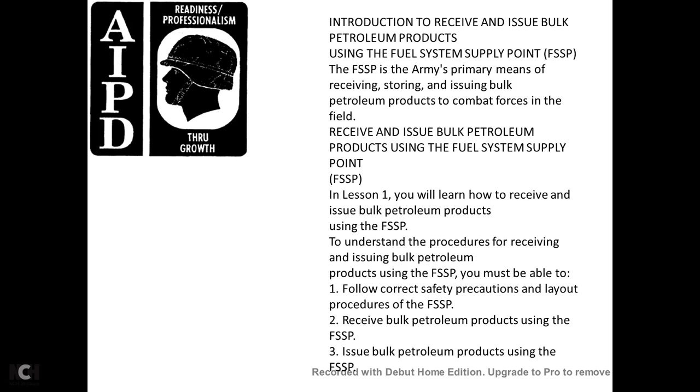To understand the procedure of receiving and issuing bulk petroleum products using the fuel system supply point, you must be able to follow the correct safety precautions, lay out the fuel system supply point, receive bulk products, and issue petroleum products using the fuel system supply point. Learning event number 1: how to follow the correct safety precautions.

Whenever working with petroleum products, there is a risk of fire. The danger can be reduced by following the proper safety precautions during all phases of the operation. The primary precaution is prohibiting smoking near the fuel system supply point. Post no smoking signs so that anyone entering or working in the supply point can see the signs immediately. Do not let anyone carry matches or smoking materials in the supply point. Collect smoking materials at the entrance checkpoint, and ensure that personnel smoke only in designated smoking areas.

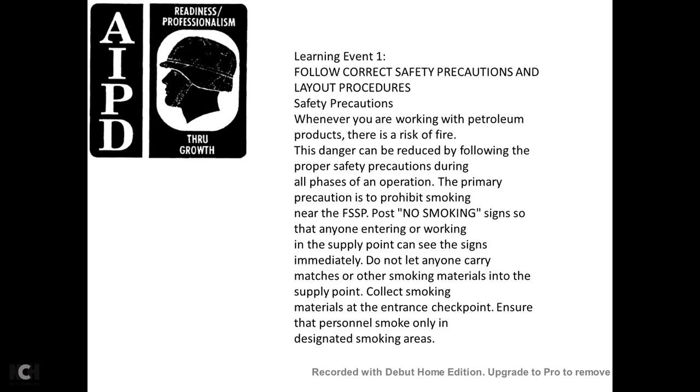Place fire extinguishers at all receipt, storage, and issue points. All fire extinguishers must be operational and inspected daily. Ensure the equipment is grounded. Follow the proper grounding and bonding procedures during all fuel transfer operations. If there is an enemy attack, electrical storm, or fire in the immediate area, stop operations immediately. Disconnect all pump hoses. Move all vehicles out of the area.

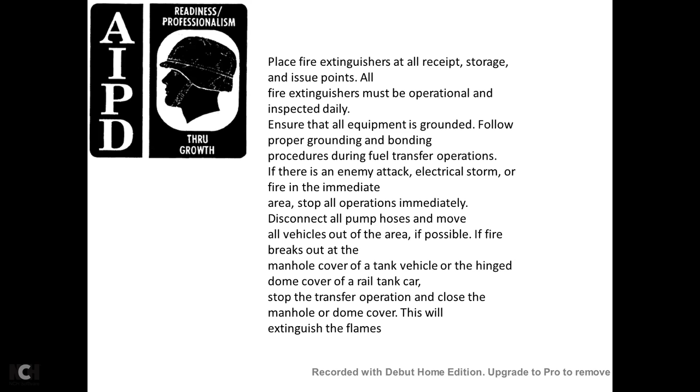If a fire breaks out over the manhole cover of a tank vehicle or the hinged dome cover of a railway tank car, stop the transfer operations and close the manhole dome cover. This will extinguish the flames. Do not permit welding, open flames, or lights other than approved explosion-proof flashlights within 100 feet of any receipt, storage, or issue operation. When operating the pump, if you see sparks, stop the pump and inspect all the grounding and bonding connections. Make sure the connections are bare with metal-to-metal contact. If you cannot find any faulty connections, look at the power equipment in the area to find the possible cause of stray current.

Maintain a distance of at least 25 feet between tank vehicles during receipt and issue operations. Also keep all tractors coupled with the semi-trailers while product is transferred. This allows the semi-trailer to be moved quickly in an emergency. The canvas top of the tractor must cover the driver's compartment of the vehicle while loading or unloading product. This keeps the inside of the tractor from being splashed with fuel.

Do not use a nozzle equipped with a locking device. If the nozzle is equipped with a locking device, disable the locking device before use. Ensure the nozzle is attended constantly during fueling. Take all precautions possible to prevent spills, using drip pans whenever hoses are being connected or disconnected, and repair all leaks immediately. If needed, replace defective hose gaskets and valves. All persons must be properly trained and follow all safety precautions. They must know how to properly administer first aid for fuel-related injuries.

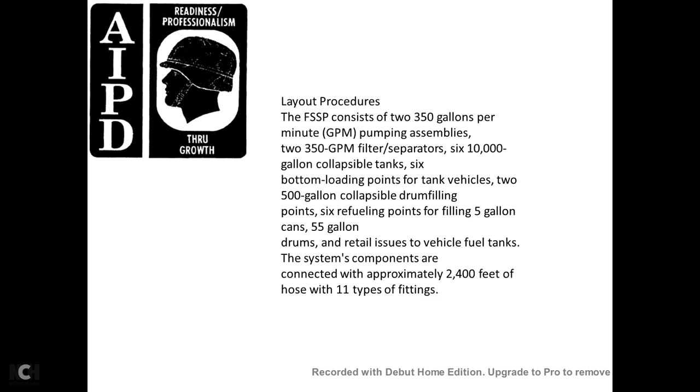Layout procedure of the fuel system supply point. It contains two 350 gallon per minute pumping assemblies, two 350 gallon per minute filter separators, six 10,000 gallon collapsible tanks, 6 bottom loading points for tank vehicles, two 500 gallon collapsible drum filling points, 6 refueling points for filling 5 gallon cans or 55 gallon drums and retail issue to vehicle fuel tanks, with system components connected with approximately 2,400 feet of hose and 11 types of fittings.

The fuel system supply point is designed to be flexible in layout. The system layout depends on the needs of the mission and the variables of the terrain. You must lay out the system and identify the components needed. For example, if your mission does not include the filling of 500 gallon collapsible drums, then you do not include the filling points in your layout.

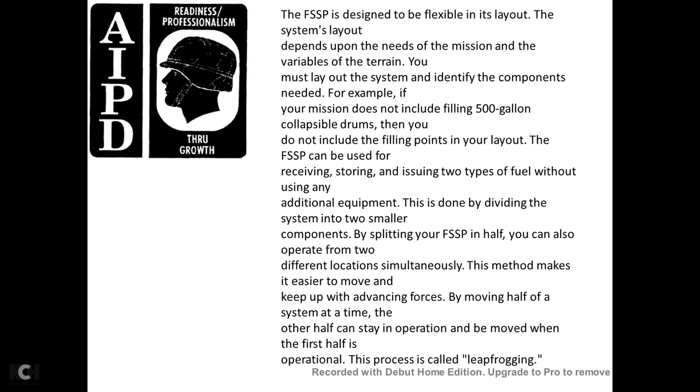The fuel system supply point can be used in receiving, storing, and issuing 2 types of fuel without using additional equipment. This is done by dividing the system into 2 smaller components by splitting your fuel system supply point in half. You can also operate at 2 different locations simultaneously. This method makes it easier to keep up with advancing forces by moving half of the system at a time. The other half stays in operation while the first half moves; this process is called leapfrogging.

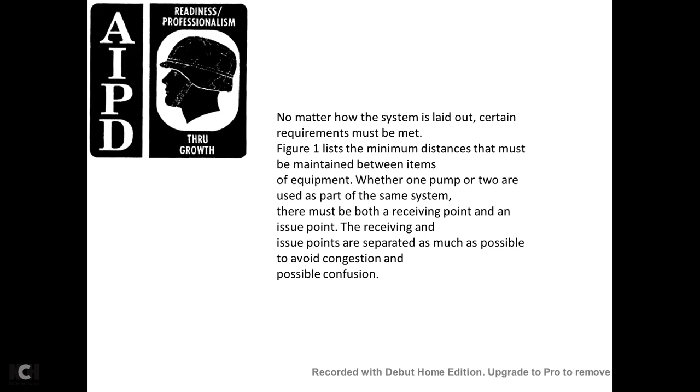No matter how the system is laid out, certain requirements must be met. Figure 1 lists the minimum distances that must be maintained between the items of equipment. Whether one pump or two are used as part of the same system, there must be both a receiving point and an issuing point. The receiving and issuing points are separated as much as possible to avoid congestion and possible confusion.

Figure 1 shows the usual distance between the components of the fuel system supply point: receipt manifold to receiving pump, 60 feet; receiving pump to manifold on the first tank, 60 feet; 10,000 gallon tank to 10,000 gallon tank, 40 feet; manifold on the last tank to the discharge pump, 60 feet; discharge pump to the filter separator, 40 feet; filter separator to fuel servicing nozzle, 60 feet;

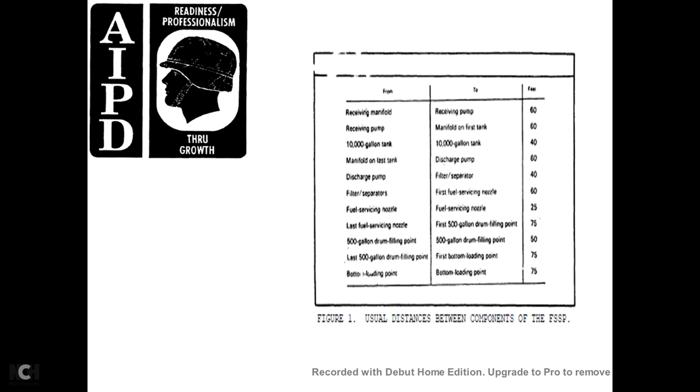fuel servicing nozzle to fuel servicing nozzle, 25 feet; last fuel servicing nozzle to the first 500 gallon drum filling point, 75 feet; 500 gallon drum filling point to 500 gallon drum filling point, 50 feet; last 500 gallon drum point to the first bottom loading point, 75 feet; bottom loading point to bottom loading point, 75 feet.

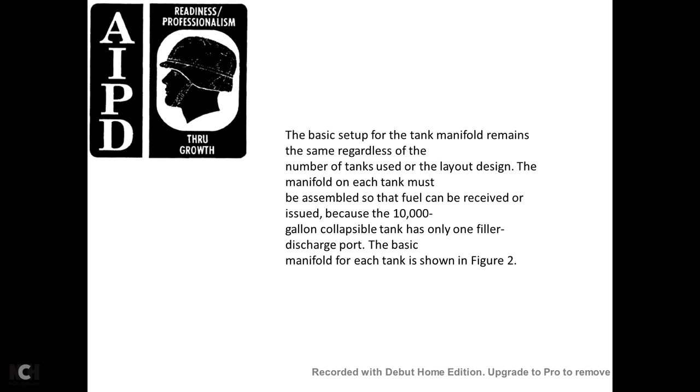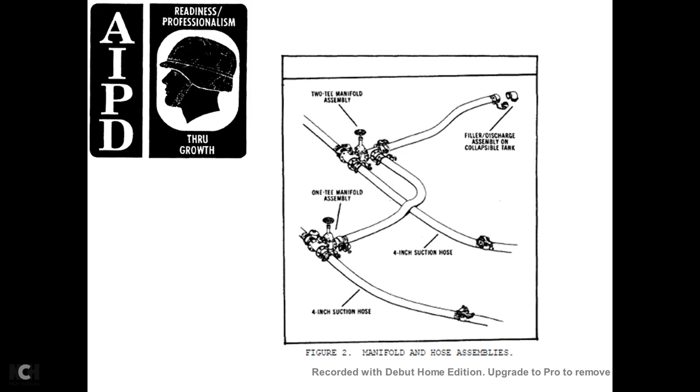The basic setup for the tank manifold remains the same regardless of the number of tanks used for the layout design. The manifold for each tank must be assembled so that fuel can be received and issued, because the 10,000 gallon collapsible tank has only the filler discharge. The basic manifold for each of the tanks is shown in Figure 2. Figure 2 shows the manifold hose assembly with a two-tee assembly, the filler discharge assembly on the collapsible tank, over to the one-tee manifold assembly in 4 sections with two 4-inch suction hoses.

Various ways of laying out the complete fuel system supply point are shown in Figure 3. Lay out the system the best way possible for the specific situation. After you decide how to lay out the system, you must prepare the areas where the tanks will be positioned. Pick up all the loose debris.

All the collapsible tanks will be surrounded with a firewall. The firewall must be large enough to contain the entire contents of the tank plus one foot of freeboard empty space. To meet this requirement, the firewall must be 26 by 26 feet inside. The firewall must be 3 feet high and 8 inches wide at the top of the berm. Figure 4 displays a berm in construction.

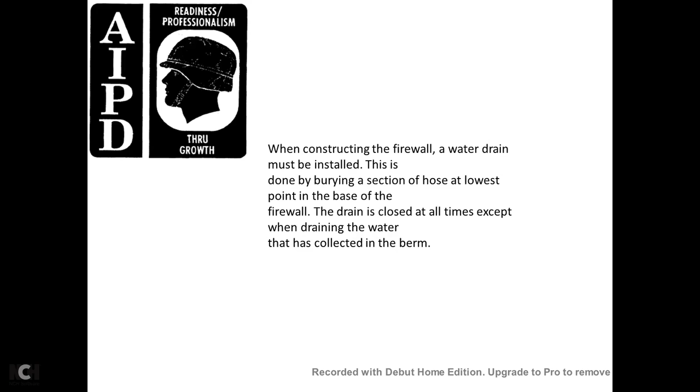Alright, here are the possible arrangements of the fuel system supply points. You have your U arrangement: the receiving point, receiving pump, filter separator, and collapsible tanks going in a U shape, with a filter separator and delivery pump going to the bottom loading points, 500 gallon collapsible drum filling points, and nozzles. The rectangular arrangement gives a receiving point, receiving pump, filter separator, and collapsible tanks in a rectangle, going through a delivery pump, filter separator, bottom loading, 500 gallon collapsible drum filling, and nozzles.

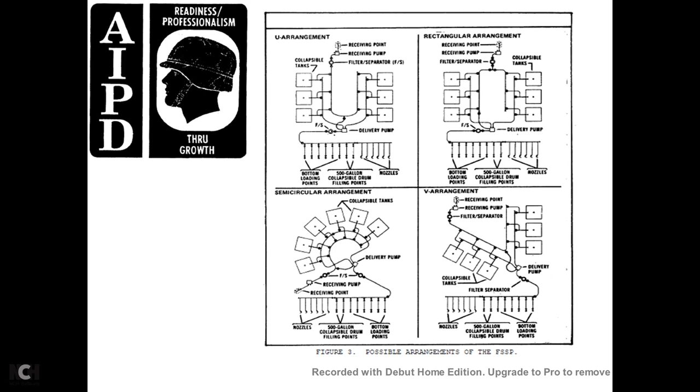All right, your semicircular arrangement goes from the receiving point and receiving pump to the filter separator, to the semicircular tank arrangement, back to the delivery pump and the fuel supply going to the nozzles, 500 gallon collapsible drum filling points, and bottom loading points. The V arrangement is a receiving point, receiving pump, and filter separator to the V arrangement of collapsible tanks, then to the delivery pump, filter separator, nozzles, 500 gallon collapsible drum filling points, and bottom loading points.

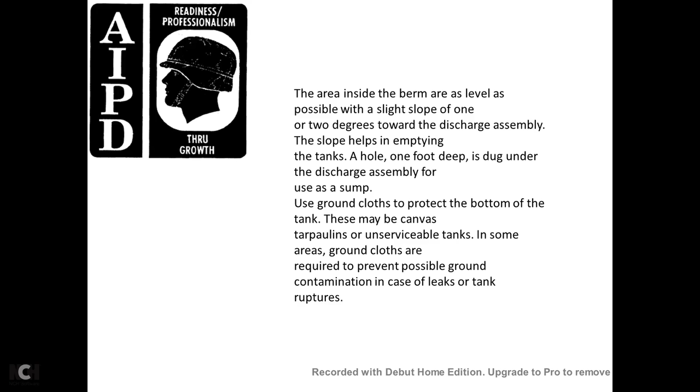The areas inside the berms are leveled, with a possible slight slope of 1 to 2 degrees toward the discharge assembly. The slope helps empty the tank. A hole 1 foot deep is dug under the discharge assembly for use as a sump. Use ground cloths to protect the bottom of the tank. These may be canvas tarpaulins or unserviceable tanks. In some areas, ground cloths are required to prevent possible ground contamination in case of leaks or if the tank ruptures.

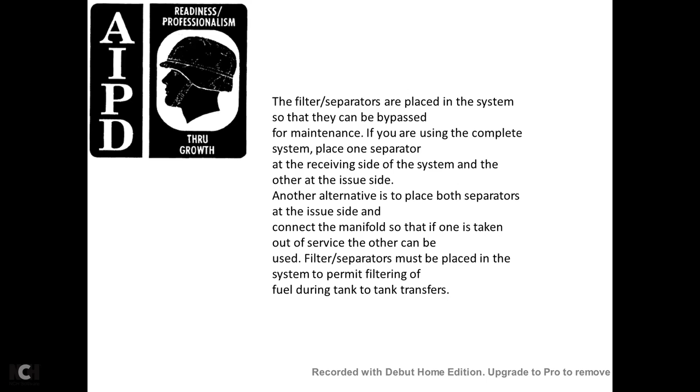Filter separators are placed in systems so that they can be bypassed for maintenance. If you're using the complete system, place one separator on the receiving side of the system and the other on the issue side. Another alternative is to place both separators on the issue side connecting manifold so that one can be taken out of service and the other used. The filter separator must be placed in the system permitting filtering of fuel during tank transfers. When personnel are laying out the hoses for the system, ensure that they only remove the dust caps and plugs when ready to make the connection.

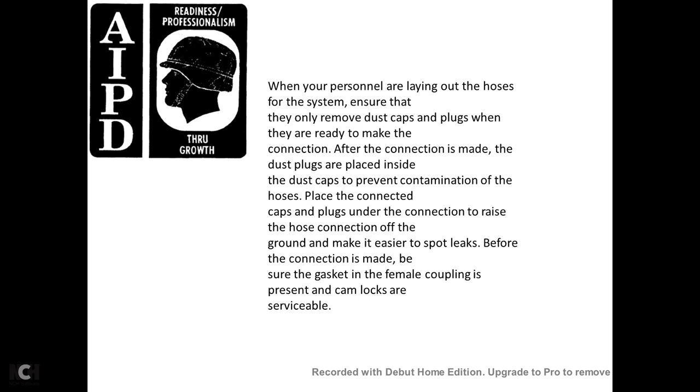After the connection is made, the dust plugs are placed inside the dust caps to prevent contamination of the hose. Then place the connected caps and plugs under the connection to raise the hose connection off the ground and make it easier to spot leaks. Before the connection is made, make sure the gasket in the female coupling is present and the cam locks are serviceable.

Learning event 2: receiving bulk petroleum products. Plan the procedure to avoid interruptions and delays. Prepare the receiving schedule before the products arrive. You are notified of the type and amount of the product as well as the date and time of arrival before receiving the product. Inspect the pumps, filter separators, hose, valves, and fittings for cleanliness and good working condition. Check the collapsible tanks for cleanliness, damage, and available space for the product receipt. Do this before the product arrives at the location.

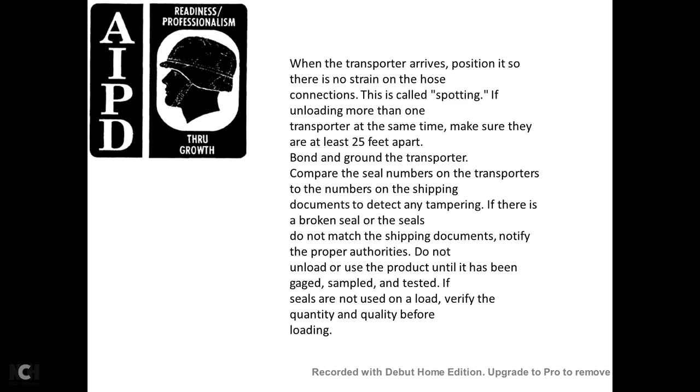When the transporter arrives, position it so that there is no strain on the hose connection when spotting. If unloading more than one transporter at the same time, make sure they are at least 25 feet apart for bonding and grounding of the transport. Compare the seal number on the transport with the number on the shipping document to detect tampering. If there's a broken seal or seals that do not match the shipping documentation, notify the proper authorities. Do not unload or use the product until it has been gauged, sampled, and tested. If seals are not used, verify the quantity and quality before unloading.

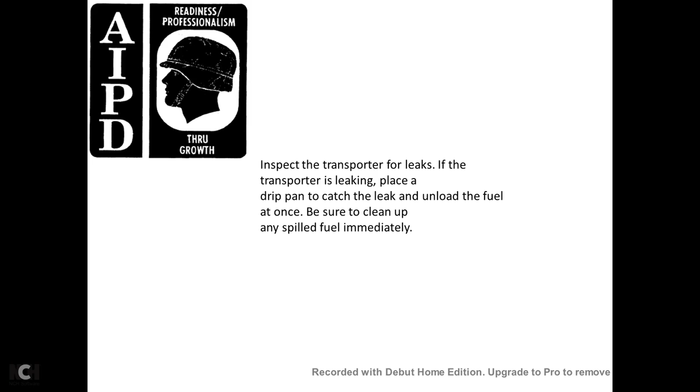Inspect the transporter for leaks. If the transporter is leaking, place a drip pan to catch the leak. Unload the fuel at once and be sure to clean up any spilled fuel immediately. Unloading tank vehicles: before starting the unloading operation, make sure the vehicle and the major components of the supply point are bonded and grounded. Place the drip pan under the manifold of the vehicle before making the connection. Make sure that you have a fire extinguisher near the receiving point. Follow these safety precautions.

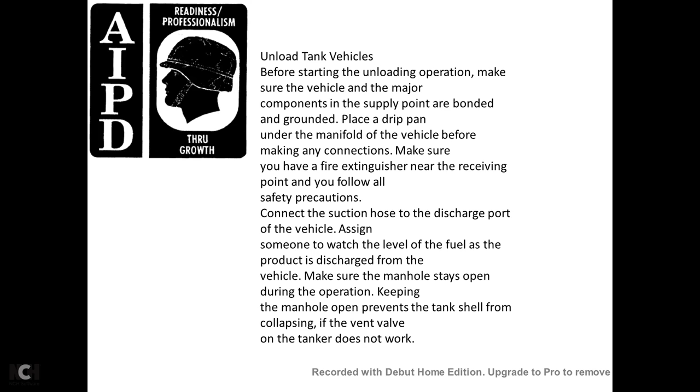Connect the suction hose to the discharge port of the vehicle. Assign someone to watch the level of the product being discharged from the vehicle. Make sure the manhole stays open during the operation. Keeping the manhole open prevents the tank shell from collapsing if the vent valve on the tanker does not work. Open the discharge valve of the tank and the suction valve of the 350 gallon per minute pumping assembly of the fuel system supply point, and start the pump at idle speed for 3 to 5 minutes.

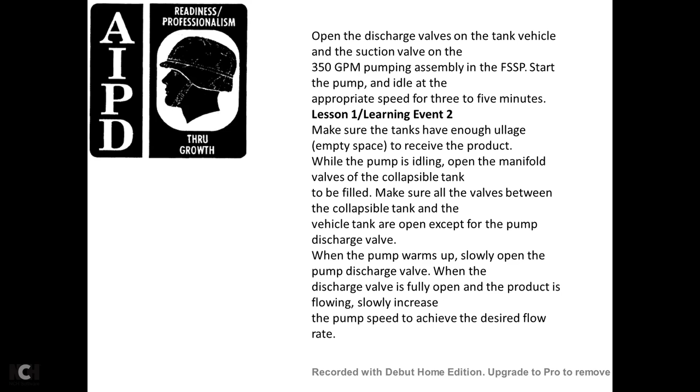Lesson 1, learning event 2 continued. Make sure the tanks have enough ullage, or empty space, to receive the product while the pump is idling. Open the manifold valves on the collapsible tank to be filled. Make sure that the valves between the collapsible tank and the vehicle are open, except for the pump discharge valve. When the pump warms up, slowly open the pump discharge valve. When the discharge valve is fully open and the product is flowing, slowly increase the pump speed to achieve the desired flow rate.

While the tank vehicle is being unloaded, check the hoses, valves, pumps, and receiving tanks for leaks. Place a drip pan under any leak. Stop the operation immediately and make any necessary repairs before continuing the operation. When the transporter is empty, idle the pump engine. Then close the discharge valve and allow the engine to idle for 3 to 5 minutes before turning it off. Close the pump suction valve, close the manhole, and close all the valves. Disconnect the suction hose and the ground wire from the vehicle. The vehicle is moved away and you prepare for the next operation.

Unloading tank cars: you may be able to set up the fuel system supply point close enough to the railroad track to receive product from railway tank cars. This allows large shipments of fuel, which frees vehicles to move other materials on the main supply route. When receiving product from a railway car, use the standard procedures for spotting railway cars. After spotting, set the brakes and chock the wheels. Place a sign reading stop, tank car connected, between the rails at a distance of at least 25 feet ahead of and behind the railway car.

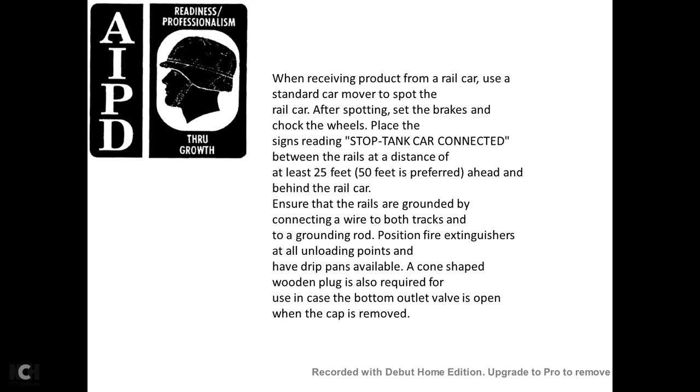Ensure the rails are grounded by connecting wires from both tracks to the ground rod. Position fire extinguishers at all unloading points. Have drip pans available, and a cone-shaped wooden plug, which is required in case the bottom outlet valve is open when the cap is removed. When the rail tank car is in position and grounded, make a quick inspection for leaks before receiving from the railway car.

If you receive a railway car that is leaking, place a drip pan under the leak and unload the car as soon as possible. Perform preliminary steps to ensure that the product is suitable for use and has not been tampered with. Unload the railway tanker car through the bottom outlet valve unless the valve is broken, or unless the proper adapter for the railway tanker car is not available. In this case, unload the car from the dome with a suction hose.

When operating the manhole cover of the railway car, stand upwind. Avoid breathing fumes. If possible, release the internal pressure before opening. Check the size of the bottom outlet pipe to get the correct size adapter, If you are using the adjustable coupling, the size is not important. Outlet pipes vary in size from 4 inches to 6 inches, so it is important to use the correct adapter connection. Connect the suction hose to the adapter.

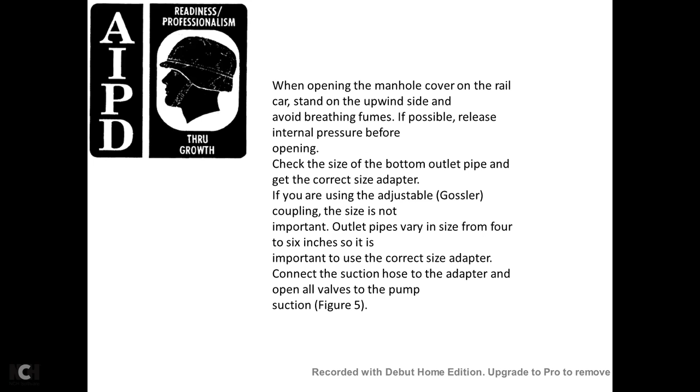Now open all the valves of the pump suction, figure 5. Open the pump suction valve. Start the pump and idle the pump 3 to 5 minutes. While the pump is idling, open the valve between the pump and the discharge receiving tank, having one person monitor the fuel level in the tank being unloaded. As the pump engine warms up, slowly open the discharge valve. Increase the pump speed to the desired flow rate while transferring the product.

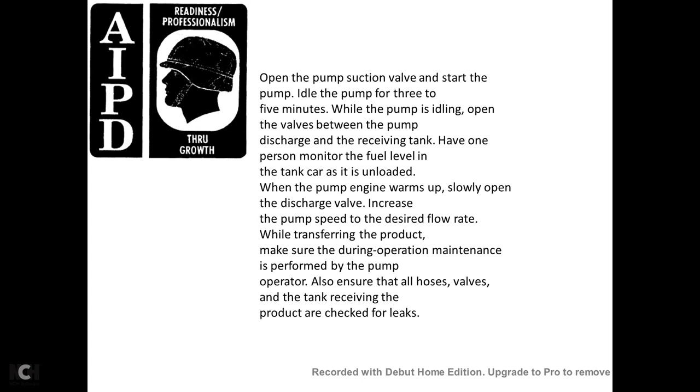Make sure that during operation maintenance is performed on the pump by the pump operator. Also ensure that all hoses, valves, and tanks receiving the product are checked for leaks. If a leak is found during unloading, place the drip pan under the leak. Stop the operation. Make the necessary repairs before resuming the transfer operation.

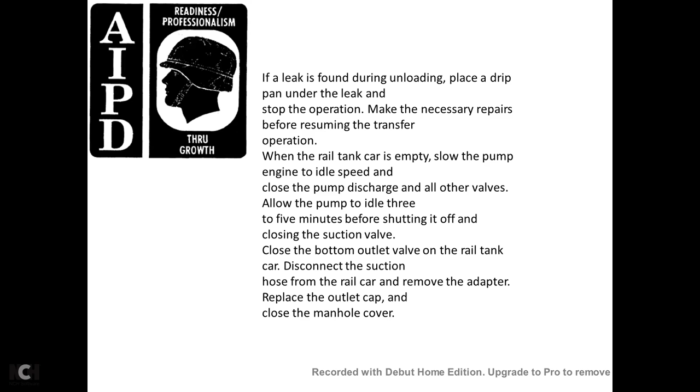When the railway tanker car is empty, slowly bring the pump engine to idle speed. Close the pump discharge valve. Allow the pump to idle for 3 to 5 minutes before shutting it off. Close the suction valve. Close the bottom outlet valve of the railway tanker car. Disconnect the suction hose from the railway car. Remove the adapter. Replace the outlet cap and close the manhole cover.

On all sides of the railway car, diamond-shaped cards say flammable. Remove the cards. Replace them with dangerous empty cards. Some of the cards are printed on both sides, in which case flip them over. Disconnect the ground wire from the rail car. Release the brakes and remove the chock block. Remove it from the transfer area. Notify the proper authorities the car is ready to be removed.

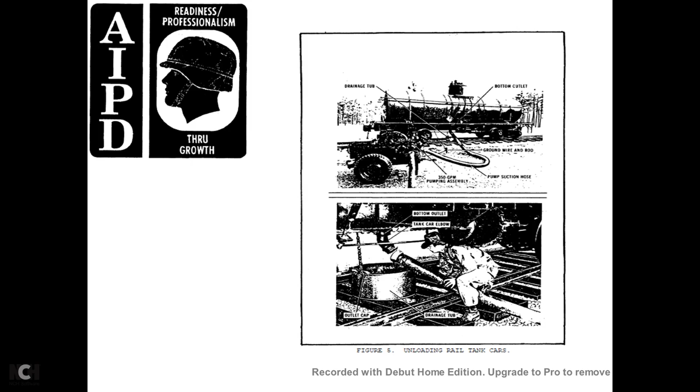Alright, figure 5 shows unloading the railway tanker cars. In the top picture, you see a drainage tub, a 350-GPM pump assembly, a pump suction hose, a ground wire and rod, and a bottom outlet. The bottom outlet has a tanker car elbow, an outlet cap, and a drainage tub.

Receipt of the product through a hose line. In some cases, you receive the product for your fuel system supply point through a hose line. As with the railway tanker, this has the advantage of freeing up other supply resources, and an added advantage of being able to receive more product into your system, assuming there's an adequate source at the other end of the hose line. The hose line usually connects directly into the manifold system on the discharge side of the receiving pump.

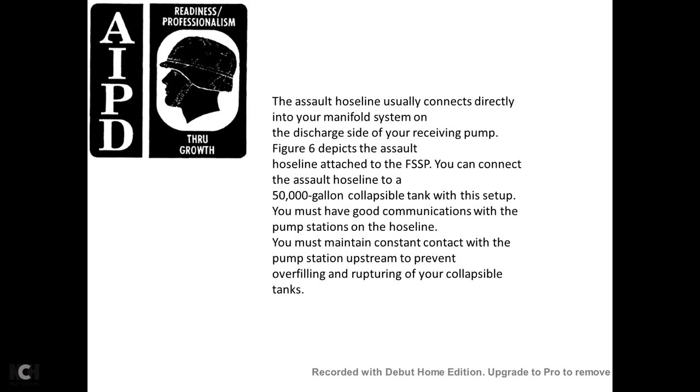Figure 6 depicts the hose line attached to the fuel system supply point. You can connect the hose line to the 50,000-gallon collapsible tank with this setup. You must have good communications with the pump station on the hose line. You must maintain constant contact with the pump station upstream to prevent overfilling or rupturing of your collapsible tank. You will receive pumping orders before the operation begins. Pumping orders tell you how much fuel you will receive and how long the pumping operation will take.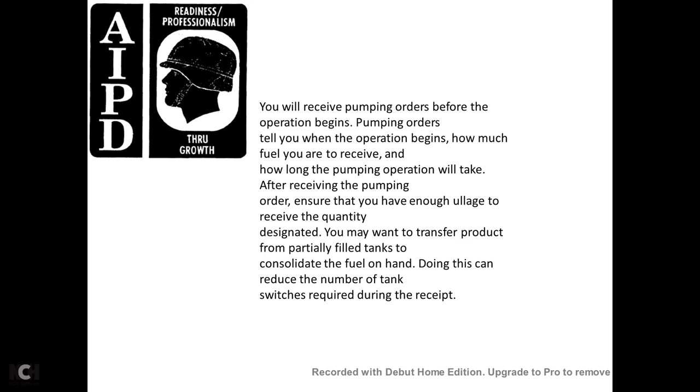Upon receiving the pumping order, ensure that you have enough ullage for receiving the quantity designated. You want to transfer the product from partially filled tanks, consolidating the fuel on hand. Doing this reduces the number of tank switches during the receipt. Once you have decided which tanks are to receive the product, you can determine the valves that need to be opened. Remember, when you are switching tanks, open the valves to the next tank before closing the valve to the first tank. Failure to follow this procedure results in overfilling or rupturing the tank.

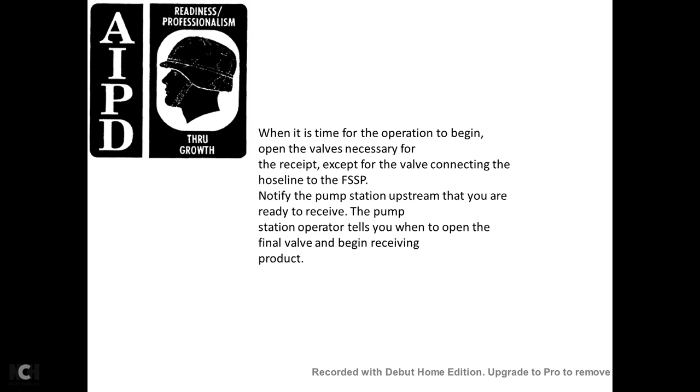When it is time for the operation to begin, open the valves necessary for the receipt, except for the valve connecting the hose line to the fuel system supply point. Notify the pump station upstream that you are ready to receive. The station operator tells you when to open the final valve and begin receiving the product. When the product starts arriving at the fuel system supply point, check the hoses and valves for leaks.

Observe the collapsible tank to be sure that it is receiving the fuel, sending out the patrol, inspecting the hose line for signs of leaks and tampering or sabotage. If you receive a large amount of fuel within the fuel system supply, more than one tank is required.

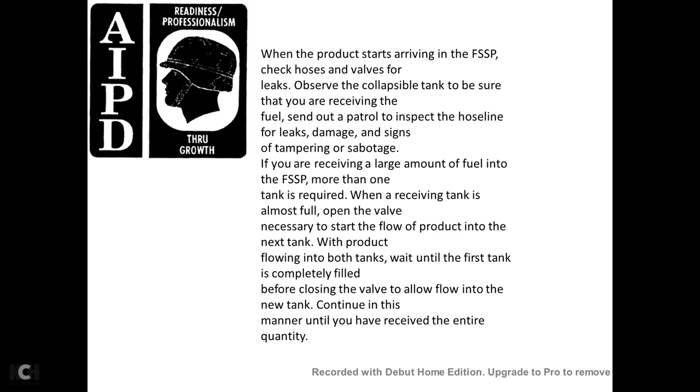When the receiving tank is almost full, open the valve necessary to start the flow of the product into the next tank, so the product flows into both tanks. Wait until the first tank is completely filled before closing the valve to allow the flow into the new tank. Continue in this manner until you have received the entire quantity.

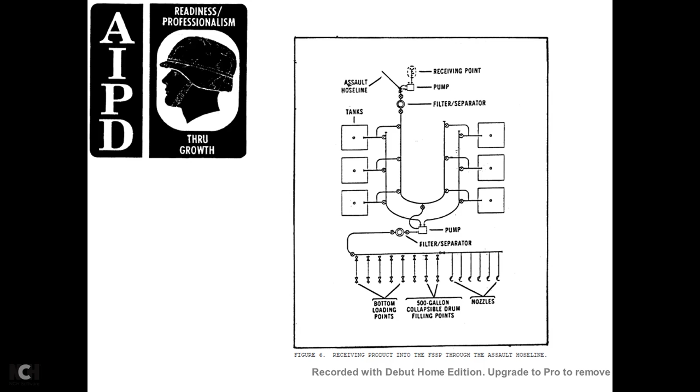Figure 6 shows the flow of product to the fuel system supply point through an assault hose line: receiving point at the pump, the assault hose line, the filter separator, to the tanks, and then into another loop with a pump and filter separator to the bottom loading points, 500-gallon collapsible drum filling points, and nozzles.

If you are receiving the product and your tanks are full, it's your responsibility to notify the pump station operator to shut down the operation. Remember that you must slowly gauge and receive the specific amount; the pump station operator notifies you when you are being shut down.

If at any time during the receipt of fuel the enemy attacks or there is another emergency, notify the pump station operator to shut down the operation immediately. After the receipt is completed, close all the valves, perform after-operation maintenance, and prepare for the next operation.

Learning Event 3, Issuing Bulk Petroleum. Preliminary procedures. Issuing bulk petroleum is perhaps the most important responsibility you have with the fuel supply system. You provide the consuming units with the fuel to perform the mission. In the feeder operation, you issue the fuel in bulk as far forward as possible.

Usually, the supported units pick up the bulk petroleum from you in their organic vehicles. However, sometimes vehicles are assigned to deliver to the units. Prepare an issue schedule before the transporter arrives at the fuel system supply point. Start by telling your customer what type and how much fuel you have on hand. Then tell the customer when to pick up the product at your facility.

If your transporter is delivering the product, tell the customer when to expect the delivery, so he can be prepared for its arrival. To avoid delays and interruptions, schedule issuing. In other words, do not have more transporters at your supply point than you can handle at one time. Also, make sure you have enough product on hand to fill all the requests.

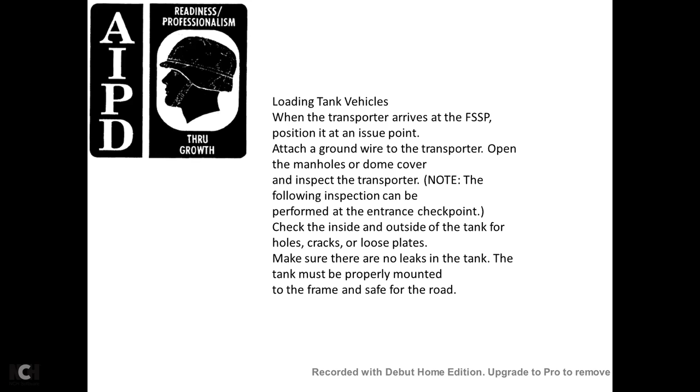Check the inside and outside of the tank for holes, cracks, and loose plates. Make sure that there are no leaks in the tank, and the tank must be properly mounted to the frame and safe for the road. Inspect the interior of the tank. If you see any residue such as rust, sand, or dirt, reject the transport and have it cleaned. Check the interior of the tank for foreign objects such as tools, bolts, and old seals, and have authorized personnel remove objects from the tank.

Connect the discharge hose to the receiving port of the vehicle. 3 soldiers are needed to load the tank vehicle. Assign 1 to watch the product as it enters the tank so that you do not overfill the vehicle. In addition to the person on the vehicle, there must be 1 person at the vehicle's valves and 1 person at the pump. Coordination between them is important to avoid overfilling.

Open the receiving valve of the vehicle and the manifold valve of the collapsible tank supplying the product, and make sure all the other valves between the collapsible tank and the tank vehicle are open. Open the suction valve of the 350 gallon per minute pump assembly. Start the pump and idle the pump 3 to 5 minutes to allow the pump to warm up. Open the discharge valve of the pump. Slowly increase the engine speed to obtain the desired pump rate.

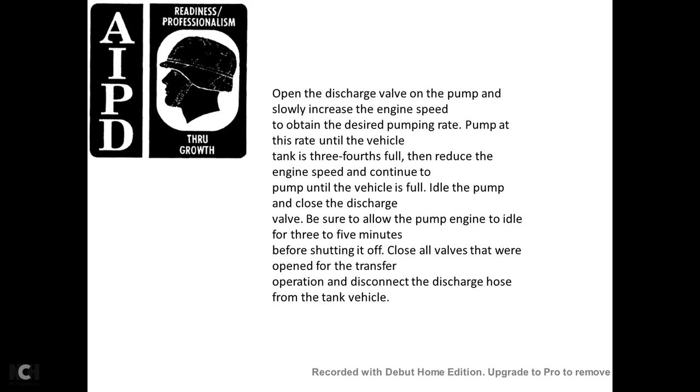Pump at that rate until the vehicle tank is 3/4 full. Then reduce the engine speed, continuing to pump until the vehicle is full. Idle the pump and close the discharge valve. Be sure to allow the pump engine to idle 3 to 5 minutes before shutting it off. Close all the valves that were open for the transfer operation. Disconnect the discharge hose from the tank vehicle. The product must stand for 15 minutes.

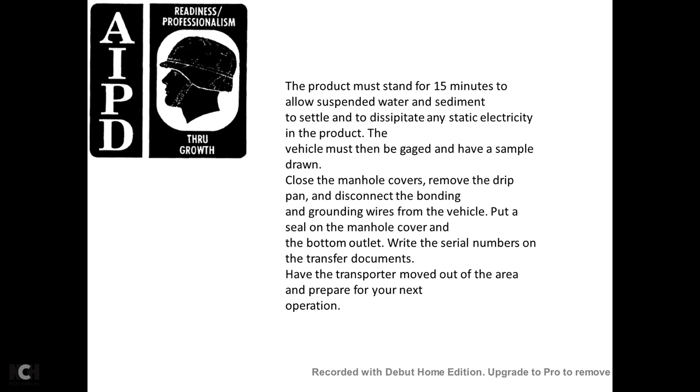Allow the suspended water sediment to settle and dissipate the static electricity in the product. The vehicle must be gauged and have a sample drawn. Close the manhole cover and remove the drip pan. Disconnect the bonding and the grounding wire from the vehicle. Put a seal on the manhole cover and on the bottom outlet, and write the serial numbers on the transfer documentation. Complete the documents, have the transporter move out of the area, and prepare for your next operation.

Loading railway tanker cars. There may be times for issuing products into railway tanker cars from your fuel system supply point. The advantage is being able to move large quantities of fuel to a forward location without adding traffic on the main supply route. Load all tanker cars through the bottom outlet unless the bottom outlet is broken and correct adapter fittings are unavailable.

When unable to use the bottom outlet, load the tanker car through the dome. Loading through the bottom outlet is far better because it prevents vapor formation, reduces static electricity, and protects the fuel against contamination from outside sources. Follow the safety precautions outlined in Learning Event 2.

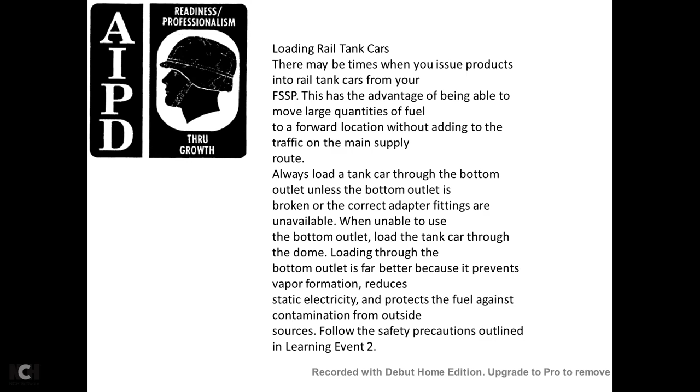After you inspect the tanker car and are assured of its condition, ensure the track rails are properly bonded and grounded. Inspect the mechanical cable connections. Make sure they are secure and make bare metal-to-metal contact with the rail and car. All major components of the supply point system must be bonded and grounded. Put a fire extinguisher near the tank car. Make sure it is easy to see and reach.

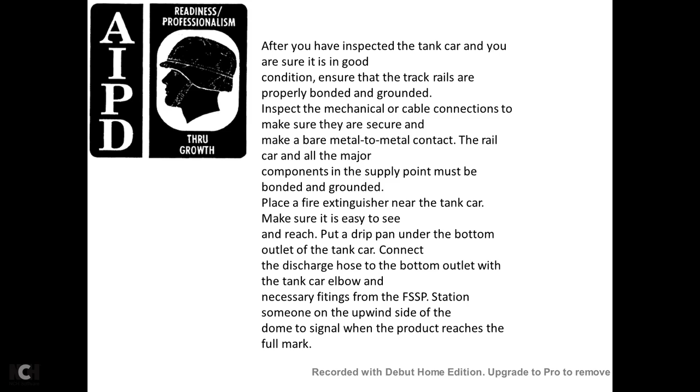Put a drip pan under the bottom outlet of the tanker car and connect the discharge hose to the bottom outlet of the tanker car with an elbow and the necessary fittings from the fuel system supply point station. Station someone on the upwind side of the dome to signal when the product reaches the full mark.

Open the bottom outlet valve of the tanker car and the manifold valve of the collapsible tank supplying the product. Make sure that other valves between the tank car and the collapsible tank are open, and open the suction valve of the 350 gallon per minute pumping assembly. Start the pumping engine. Allow it to idle for 3 to 5 minutes. Open the discharge valve of the pump and increase the speed to the desired flow rate.

Have the person on the tank car check the product level in the rail car to avoid overfilling, but never allow him to put his head inside the dome. When the tanker car is 3/4 filled, reduce the pumping rate and continue pumping until the product reaches the fill mark. If the tanker car has no fill mark, fill it to the top of the tank shell. Idle the pump engine before quickly closing the discharge valve and the tank car bottom outlet, allowing the pump engine to idle 3 to 5 minutes before turning it off.

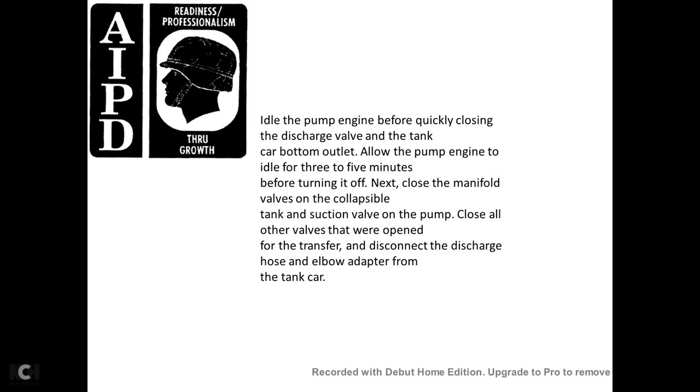Next, close the manifold valves on the collapsible tank and suction valve on the pump. Close all the other valves that were open for the transfer, and disconnect the discharge hose and elbow adapter from the tanker car. Replace the bottom outlet cap after inspecting the gasket. Replace the gasket if needed, and then the product must stand for 15 minutes to allow the suspended water and sediment to settle and dissipate any static electricity in the product.

The rail car is gauged and a sample drawn. Close and lock the dome cover and place the seal numbers on the shipping documentation. Release the brakes. Remove the tanker car from the issuing point. Check or change the placard on the side of the rail car to read flammable.

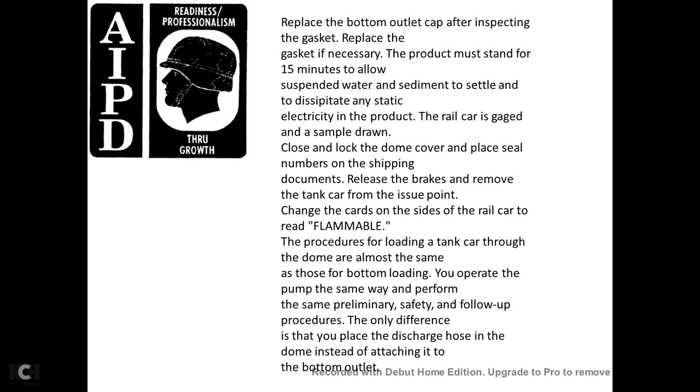The procedures for loading a tank car through the dome are almost the same as those for bottom loading. You operate the pump the same way and perform the same preliminary safety and follow-up procedures. The only difference is that the discharge hose goes into the dome instead of attaching to the bottom outlet; the discharge hose is placed through the dome and almost touches the bottom of the tank. If you do not put the hose in far enough, the product splashes and gives off an excessive amount of vapor. This creates a potential fire hazard.

Make sure that there's no strain on the hose or it may move and come out of the tank during the transfer operation. Always station someone on the dome to monitor the hose and signal when the tank is full. Start the filling at a reduced rate until the end of the hose is completely submerged in fuel. Wait at least 5 minutes after the filling stops before removing the hose. This reduces the chance of static electricity arcing when the hose is removed from the fuel. And that is

Receiving and issuing petroleum products using the fuel system supply point, subcourse QM5025, edition 6, AIPD.